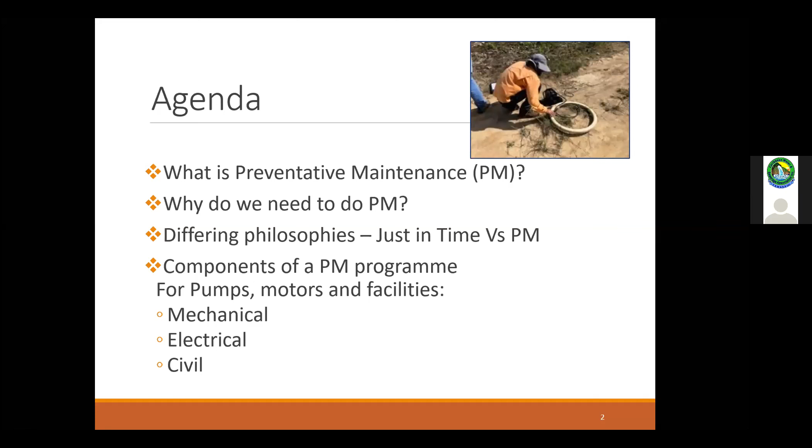So here's one definition, you've probably heard similar ones. PM, or preventive maintenance, basically is done to assure the optimal working conditions, and it conserves the lifespan of the equipment. So you've got different appurtenances in a water system, from pumps to motors, hydrants, reservoirs, tanks, pressure regulating valves, water meters - the whole list. And they all have different lifespans. When we purchase something new from a manufacturer, either one of, or 100, or 1,000 of them, they tell us that you might get a 15-year warranty, they tell us you might get a 1-year warranty.

But once it's live in the system and is delivering safe, potable drinking water, it now falls onto us as operators to ensure that it delivers both in accordance with quality specifications, and according to the budget that we've developed. So for instance, residential water meters - people call them the cash register of the water system, right? Our revenues are derived from usage through the meters, so it needs to be accurate, which means it needs to be tested. So that's just one example.

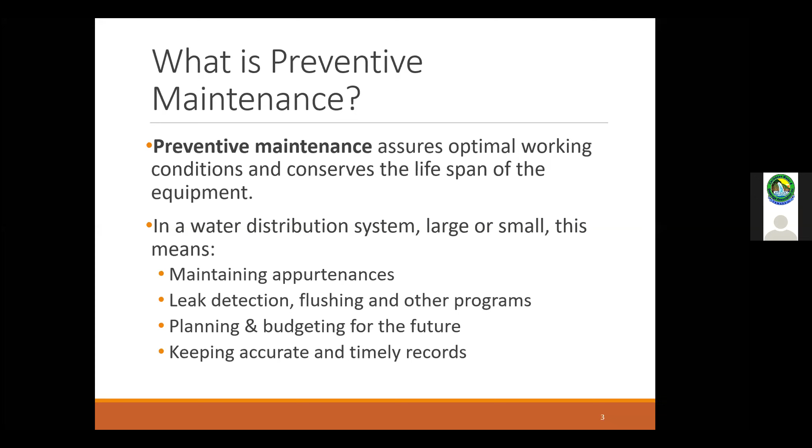So basically, a preventive maintenance program is these things. And again, wearing your operator hats, how well do you understand your system? I'm not talking about the systems I've worked in, but I want you to think about your systems - how it operates, what its strengths are, what its weaknesses are.

It may be the power supply that runs the pumps, or it might be the reliability or durability of your treatment plant. As operators, as you build up experience in your water system, you get to know where the strengths are and where the weak spots are in a system.

Even in the systems I've worked in, North Vancouver, because of the high change in elevation between our pressure zones, the weak spots were the very small, undersized reservoirs. As the population grew in that municipality, the reservoirs were not able to keep up in summertime, which meant a ton of overtime for operators to go and actually turn pumps on and off by hand to ensure the water supply didn't fail, not only for domestic supply, but for firefighting.

As operators, you start to know what your system is doing at certain times of day, different seasons, weather conditions, even different operating circumstances, like key operators not being able to come to work. So is there an impact on the actual system? Because if the only person who knows how to repair a pump, let's say, wins the lottery and is off work for the next 20 years spending all their money, how is the system going to function?

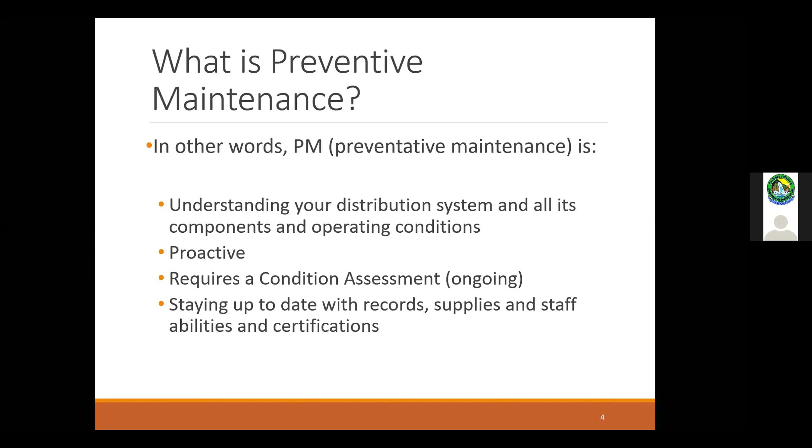they know it will be a nightmare to repair. Well, that's not preventive maintenance. That is not looking ahead with the sense of trying to optimize and maintain the system for the ratepayers, for the members of that community, so that whether it's a Sunday in July or a Thursday in December, the system will still perform. And I mentioned in the last bullet there on that slide, certifications. A trained staff is critical to doing preventive maintenance. Otherwise, you don't have the people ready in place to start some of the programs that we're going to talk about. So I hope that makes sense.

And again, some people ask, why do it at all? Why not just wait for it to fail? It is expensive to do preventive maintenance, because it means that you're rolling trucks and staff out onto the distribution system, looking for or turning valves, servicing and testing water meters that are working just fine. So is that doubling up?

Some people feel like, well, that raises the overall cost of managing the system to a point where if we have to go back to our council or to ratepayers and say we need more money because we have to have the money to take X number of pumps out of service and get them to the shop and have the motors checked and the impellers replaced.

Yes, but the understanding is that if we do it, we can minimize the opportunity. Not prevent entirely, but minimize the opportunity for failure. For sure, it doesn't guarantee that a failure won't happen. Utilities, I'd say some of the best run utilities all over the world still have water main breaks, still have flooding, still have power failures. So it's not about perfection. It's about ensuring that whatever the weakest link in the system is, you as an operator are aware of it and know what would have to happen in case that weak link does fail.

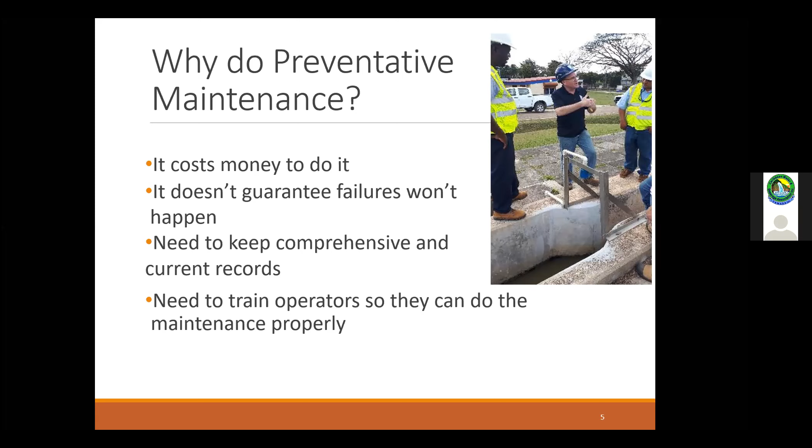So it's really critical that in order to be effective in your PM programs, operators need to be trained. And utilities overall, large and small, take that very seriously. Sometimes they don't have the resources necessary to train everyone to that level. So again, it's like reallocating the dollars you have where you think they will do the most good. I hope that makes sense.

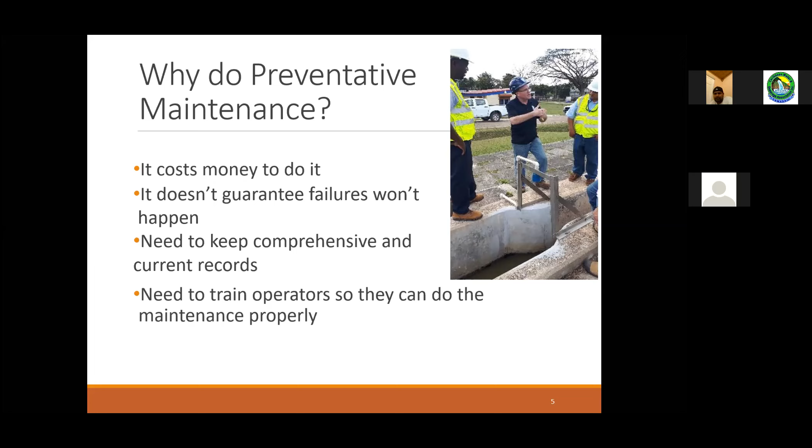So just as context, it's not always been about preventive maintenance.

The American Public Works Association for years operated on this idea that we will fix it when it breaks. So a road, the asphalt crumbles, sinkholes start to develop, erosion into ditches - okay, that's when we'll go out there and dig it up and repave it, or mill and pave, or do whatever strategy we can. A bridge is starting to fail, or it's undersized, then we'll find the money to make it work. That was a huge philosophy, and a lot of superintendents and managers had very good careers all the way through

the early 20th century on that philosophy. A couple of issues around that is that when infrastructure all starts to fail at the same time, 50 years after a building boom, and now we have 20 bridges or 3 dams and 16 reservoirs that need replaced, money in current dollars often not able to be found.

An example where I live right now is the schools, the children's schools need upgrade for earthquake - that's one of the big hazards this part of the world. Well, there's not enough money to fix all of the schools at the same time. So the idea of a preventive maintenance program, as opposed to just in time, is that you can start to determine what your future costs are going to be and start putting that money away. And if council doesn't give you the money, at least you have documents in existence that suggest that we have a shortfall 5 years from now, or right now. I mean, that's quite common, which the just-in-time school doesn't really allow you to do.

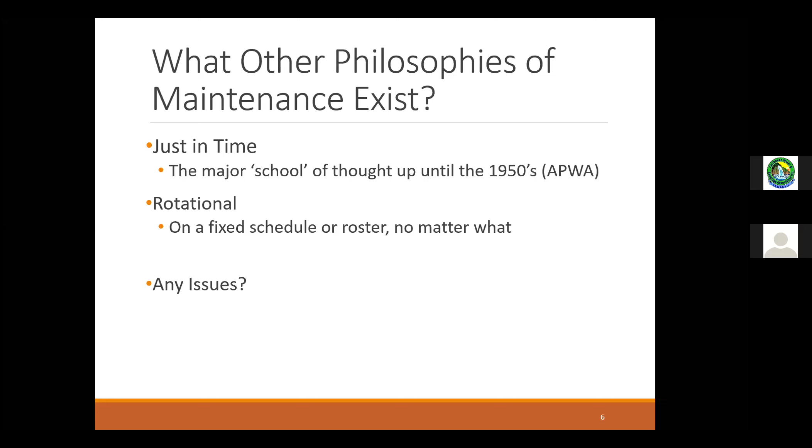So these have all been very popular ideas of how to maintain water systems, but they do fall short. And one of the keys about talking about preventive maintenance, in other words a proactive approach, is that we want to make sure that our ratepayers are getting the best value for the dollars they have, and that we're doing that by making it as reliable a system as possible. I mentioned earlier, as operators, we all inherit the system that we all had a first day of work.

Well, there was a water system there. Very few of us actually create the water system that we work for. So by inheriting it, we inherit all the good things and all the bad things, and all the strengths and weaknesses. So as a manager, when I went to a new water system, one of the first things I wanted to look at was the budget.

But more importantly than the total dollars spent, I wanted to see where the dollars were being spent compared to the actual reliability, age, or condition of the appurtenances. I want to match that up, right?

So as a pump mechanic, we'll talk a little bit more about pumps in a bit. I want to make sure that the time I have during a working day and week is spent where it's most needed. And the only way you can do that is by planning and having some sense of prioritizing what are the highest priorities in your area, whether that's in pumps and motors, or in the SCADA system, or in the treatment plant. Basically having that understanding of how the system works.

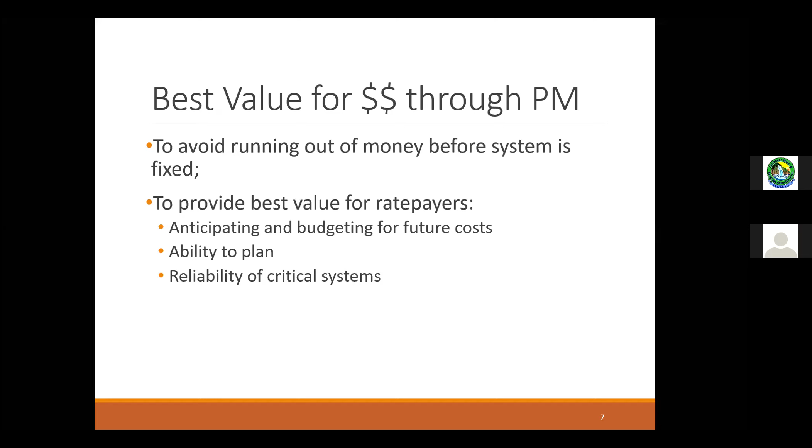So, talked a little bit about what due diligence is. And due diligence basically, it doesn't mean—if I can say I have done my due diligence, you hear lawyers talk about due diligence and insurance people talking about it—it really means, can I meet the standard that the city has set for me as an operator? So in other words, it doesn't mean having a gold-plated water system that never fails or never experiences low pressure, or leaks, or the occasional high spike of turbidity or taste and odor issues.

That's not it at all. It doesn't mean we never have a failure. But what it does mean is that I, as an operator, have done everything in my abilities and up to the levels I've been trained, with the resources the city gives me, to plan, to budget, and to minimize risk.

So knowing that a pipe that could fail because it's 75 years old, and we don't have the right couplings to make the repair—now you're not meeting the test of due diligence. You know the OD of that pipe, and you know that the repair couplings are 3 months away because they're an oddball fitting. Well, then the due diligence standard is we've ordered 2 of them, and we've identified that they are to be used in this segment only, and we've trained staff accordingly.

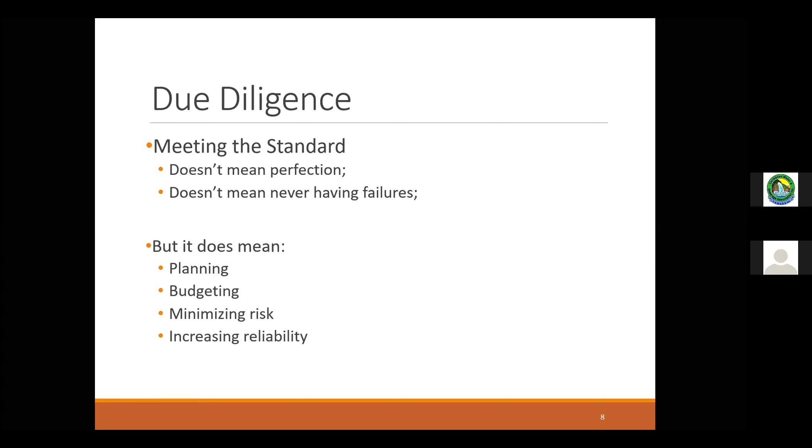So knowing and understanding what those boundaries are means that you can then plan accordingly. And in most utilities, there's never enough. The budgets are insufficient, and the pipe and the appurtenances are getting older, so that becomes a real issue. So it makes it doubly difficult, but it actually increases the need and the rationale for doing preventive maintenance. So again, an example.

So in a just-in-time philosophy, if I was the supervisor looking after water quality, you can tell you're working in a just-in-time type of environment when we only respond to complaints. We don't know what potentially could be happening in the water system, but someone's complained about dirty water or funny taste. So we go out and take a sample, get the lab results back, and then let the resident or business owner know.

We don't go out and flush ahead of time. We wait until either a health authority tells us we've had a violation, or that people are complaining.

We have little or limited or no understanding of how the system functions—in other words, where our high and low pressures are, because those can fluctuate seasonally or by time of day. And for those of you working with intermittent systems, what does that do to the water quality situation in your utility, and do you have to adjust accordingly?

So operators end up in a just-in-time philosophy with mostly just anecdotal information—stories people tell about how things are. As operators, we hear a lot of stories. It's one of our best things, collecting stories about how the system works. Do you remember when the water main on such and such a street exploded, and what we had to do to fix it?

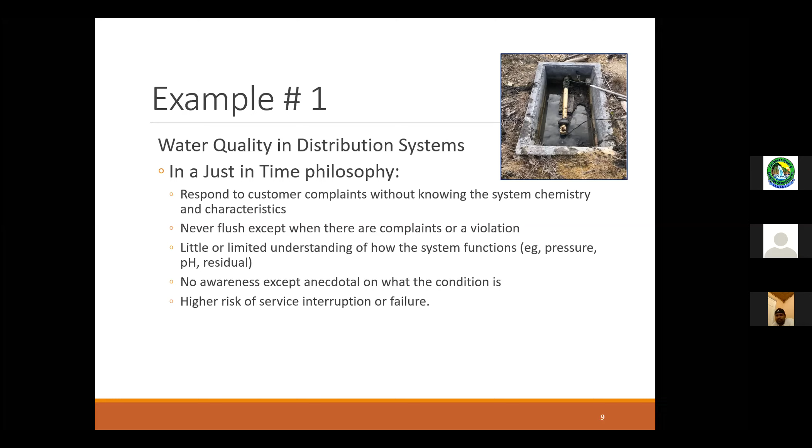But in a PM program, these are the kind of elements you'd expect to see. Programs are developed—we do sampling, we do monitoring. Where? As operators, you know where those weak links are: potential where one or two water supplies might be blended, or at the treatment plant, or leaving the treatment plant, or in a reservoir. We develop those locations and then start our scheduling.

A lot of utilities don't sample as much as they would like to because they don't have the budgets, but they still meet the test of due diligence because they're meeting the health authority's minimum requirement. Sure, they might love to do more sampling, but that's what they have the ability to do.

They flush water mains either seasonally or on a rotation, basically weekly or monthly, depending on the types of water quality issues. They use the data from sampling and monitoring to generate programs. A lot of utilities in the United States use HPCs—heterotrophic plate counts—the results of those samples as thresholds to begin spot flushing. So on top of an annual flushing program, they will do spot flushes wherever sample results exceed 200 CFUs. So they have the sense of being in front of potentially adverse water quality.

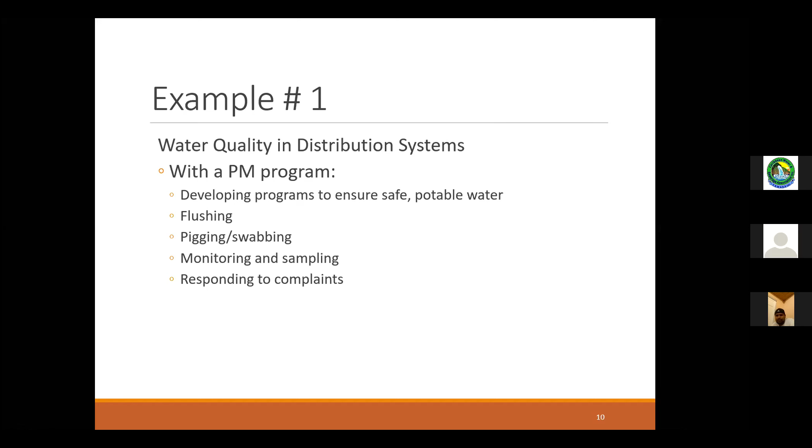In other words, they're not just waiting for the complaint to happen. They are looking at data that they or others in the utility collect, and then develop their programs. So now you have a sense of reaction versus planning, and you can apply that to all areas, right?

Just using fire hydrants and valves—think about your own system: out of the total number of valves, what's your confidence that all of those valves will operate when we need them to? That could simply be, can you get on the operating nut to turn a valve in an emergency? There are lots of places where valves are 12 feet deep in the colder parts of Canada and the United States, and those standpipes have lots of opportunity to fill up with rock, mud and debris. If those aren't maintained ahead of time, it could be a disaster in a major emergency, or even during a planned tie-in if those valves don't work.

The city of Oak Bay, a small municipality not far from where I am, was doing a great program—they were replacing all their old fire hydrants because they couldn't get parts for them. They finally had the budget to replace the fire hydrant, so they did that: they cut the fire hydrant off the stub. As they were lifting the fire hydrant out of the ditch, the stub caught the valve and pulled the valve off the main. It was an 18-inch main, so it instantly flooded their trench and then started flooding the neighborhood.

It took them 6 hours to shut the water main down, which caused over $1 million worth of damages because they couldn't get on the valves to make a quick shutdown to prevent worse damage.

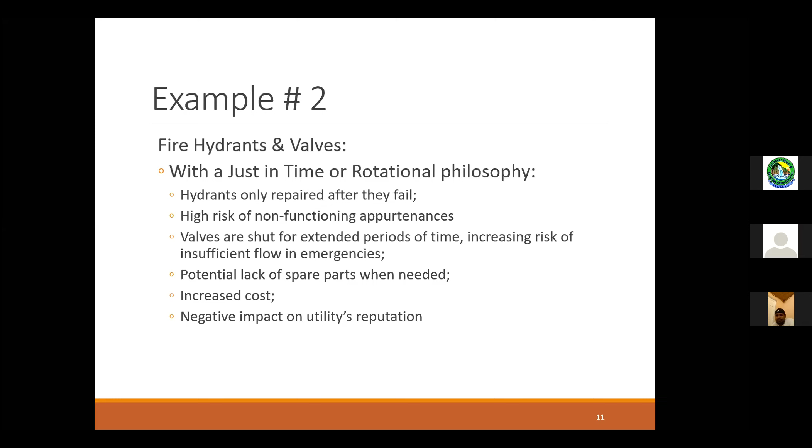So another example, but with a PM program: those valves, either whether it's an O-ring or the actual operating nut, we know about it, we fix it before we need that valve again. We schedule programs so it might take us 5 years to go through the whole city to check the valves, but we don't stop until we've checked it all.

Sure, there's nothing wrong with a valve, it hardly ever operates, right? The mains are open until we do something to them, but they better work if, 20 years from now, they're actually needed.

So we also then get a sense of what our infrastructure costs to look after, because we can budget labor, materials, and equipment to check all the valves. And if we have 1,000 valves, we can determine a price per valve on an aggregate basis to do preventive maintenance, and that goes into our planning for year 2 and then year 3.

Another example, before we start talking about pumps, is water mains themselves, and looking at how cities chase after leaks. Part of the issue in North America is water is very inexpensive, and certainly in this part of the world. So a lot of cities don't do any looking to replace valves or fix leaks before they surface.

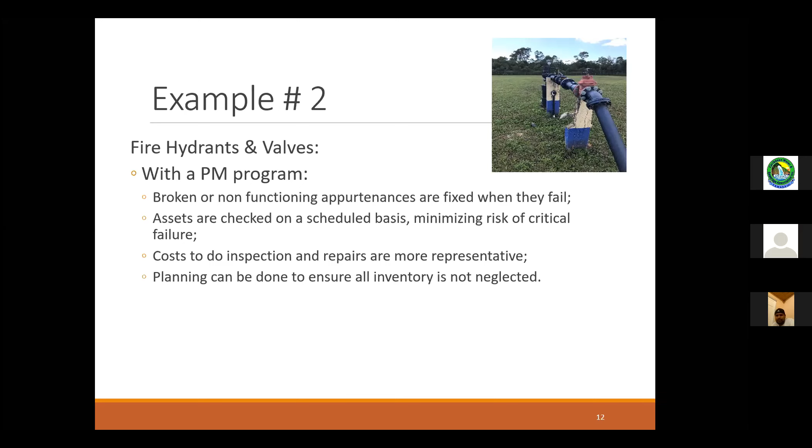So the American Water Works Association has a very simple mantra for operators: know your system. We mentioned how can you plan and understand how the system works if you don't know what's in the ground? What materials do you use? Is it iron? Is it plastic, C900, or Bionax, or poly?

What are the diameters? So how do we find the spare parts? We don't necessarily have to buy all the spare parts. We can have agreements with our suppliers to carry some stock in case of emergency or when we're doing some of our planned work. But to do that, we need to keep records.

And as operators, if your hands are touching the infrastructure, then you have the ability to collect data. Some utilities do it with barcode scanners, fancy asset management systems, whereas others just take a record of it on a card, and that card is updated in the office.

But basically, all of these bullets are about knowing how the system operates all year long - day, night, summer, winter, wet or dry conditions, peak demand versus minimal demand, because that varies depending on your community. So operators should know that, and it's really important for management of utilities to ensure that those operators are trained so that they have some understanding of what's going on.

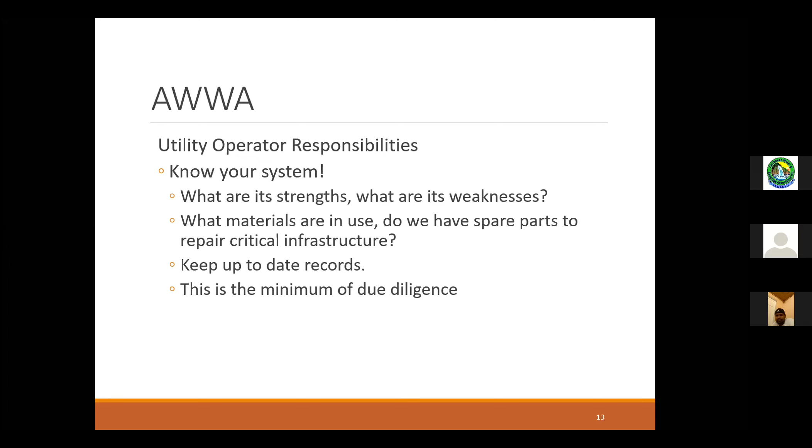And some of that is records and using them, not just putting them in a cupboard somewhere, but actually using those records going forward. So let's talk a little bit about pumps, and then I can take some questions.

So obviously critical infrastructure, right? Your pumps, motors, whether it's in a treatment plant, but specifically in a distribution system, we're pumping up to elevated storage or we're boosting inline.

If we do not have a PM program, there's a risk that a pump may fail, because it's running exceptionally high, or some of its impeller or its bearings are starting to wear, but we don't do anything before it fails. So not good.

If you do not have the ability to choose to take a pump out of service and you are simply at the mercy of a pump running and or failing, that's tough, because it's very difficult for operators to maintain standards of efficiency and also safety of the water system if you're waiting and just hoping. It's sort of the idea of fingers and toes crossed every day, and then hopefully nothing goes wrong.

Well, it's just math. Statistically, it will fail. The question is when. And that means, are we comfortable not having any spare parts? Do we have the right people to do the repair? And if something fails before we plan to do the repair, it's probably going to be more expensive.

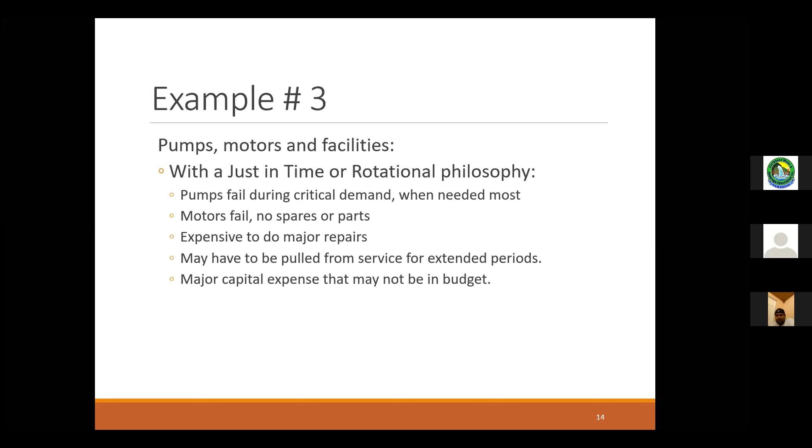And it may not be in the budget. A major pump or motor repair might exceed your operating budget and need to go for council approval, and that may take months. So if you have to do temporary bypass pumping, that's expensive, with potential impacts on health and safety as well.

But with a PM program, according to your manufacturer specs, you're servicing regularly, keep parts in stock either at your facility or at a supplier's. You're keeping records. Every time you go to a pump house, motor hours, pump hours are logged, system pressures and flows are kept so that you have a sense of how that pump is running.

If it takes 6 hours to pump, when yesterday it only took 3 hours, what's changed? Could it be an issue in the pump itself? Could there be a restriction, a valve shut? But without that data, very difficult to know.

So a PM program means we're going to do inspections. We're not just going to show up when something breaks, but inspections are done to catch problems before they arise or get worse. And that is really key, especially in the summertime, when people go on holidays, vacation, or retire.

Is the replacement staff operator trained and understands all of the steps necessary to keep the equipment and tools running.

You can tell a lot about how the system is run by how the tools that operators use are kept. Are they chucked into the back of the truck willy-nilly? Are they dirty and rusty? Or no, we know where we can find the tool, we know where we can find the materials, and they're all in good shape. This also increases the pride that you are, as operators, critical in maintaining the integrity of the water system.

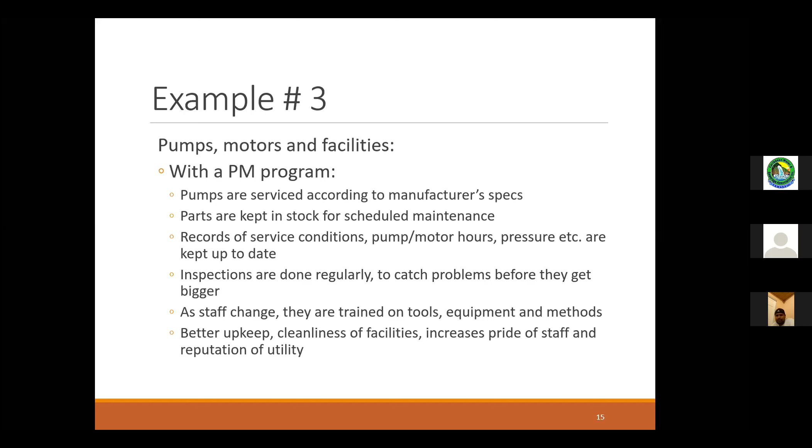If you're not building on the preventive maintenance program and helping it with more information and data, then the risk can be cost, reliability, and basically the reputation of the system.

So specifically for pumps, this isn't an exhaustive thing by any means, but just a sense of what kind of things you'd be looking for. They fall into three categories: pumps, motors, facilities. There's mechanical considerations, electrical components, and civil.

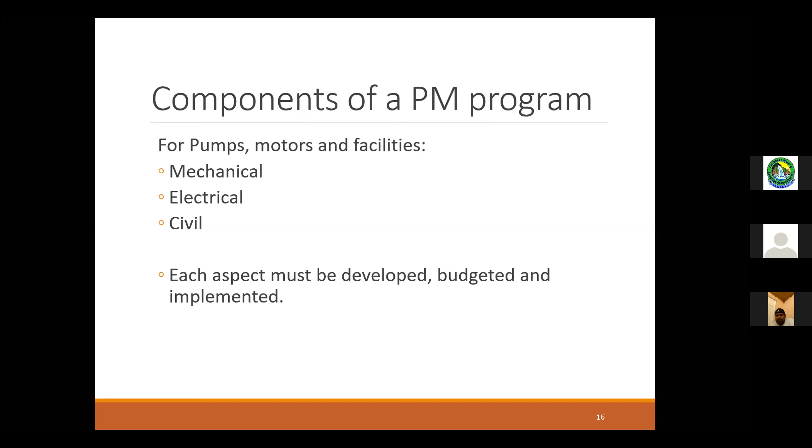Again, inspect and plan so that you have the ability to develop programs around each, budget, and implement. The manufacturers of the equipment can provide you with that information, so you don't have to start from scratch. For mechanical, things like valves and control equipment, the manufacturer will suggest what those inspection cycles are.

And by keeping records of running hours, it's not just once a week visiting a pump station or pump house, or once a day in peak times, but actually logging the hours running. As an operator, you'll start to learn which pump is working and which isn't, which is starting to slip. We're going to have to pull it and check the impeller or get a service done.

And the more you know, the more specific you can be when work has to take place. So you can either call a contractor or do the work yourself. And again, that last bullet - qualified employees do the work. Not just for the safety of the employee, especially working around electrical systems, but also around ensuring that the equipment will last as long as the manufacturer said it would.

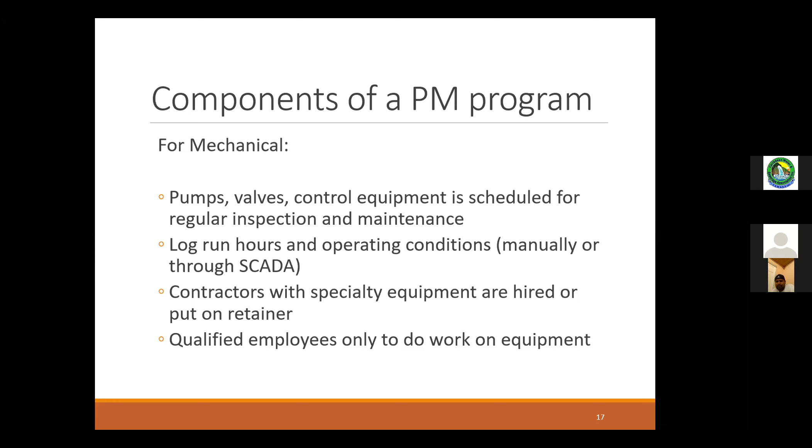And you don't void any warranties. Motors, fans, variable speed drives, and all that related equipment - again, manufacturers will tell you what the inspection criteria are, and whether you call them up when it's new and have them walk you through the actual inspection procedure, or use open source information or AWWA resources to understand how to do the different pieces of inspection and maintenance on a regular basis.

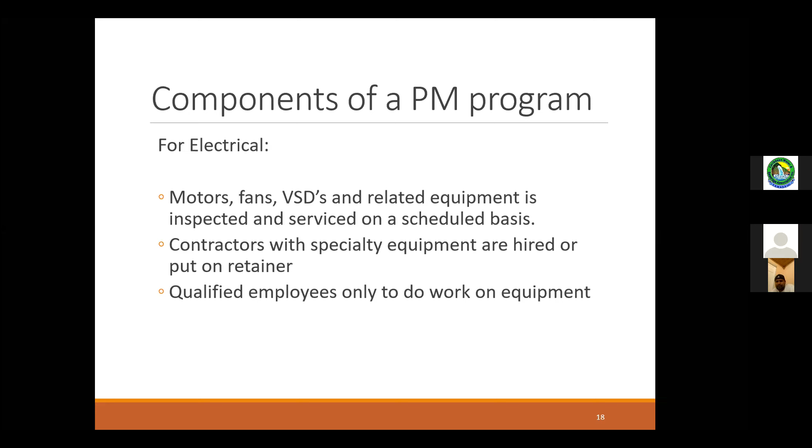Again, qualified employees have to do this. So that may be certified electricians or contractors with the appropriate tickets to work on those systems.

Civil often gets overlooked, whether it's taking off the graffiti on the outside of a pump house, whether it's clearing the vents away from materials that get piled up, or animals that make home in the vents and screens. All of that is an asset that needs to be maintained.

And again, records are just as important to keep up to date, so that you can look at the integrity of the actual pump house, housing, or chamber. Lots of examples about cracking and crumbling pump bases or motor bases that then misalign the pump and the motor, and then you have equipment failure, which could have been prevented if the operators were told or learned how to do inspections for the facilities themselves.

And as simple as, are the hatches and ladders and so on, is there proper security, and do they function as they were intended?

A lot of specialists in asset management talk about their view when they come into a utility - if the small things aren't being done well, the system might still work, but small things have a tendency to accumulate and potentially escalate. So they always look and see, well, if you're not doing the small things, are you really prepared for when larger programs or larger pieces of equipment need to be maintained?

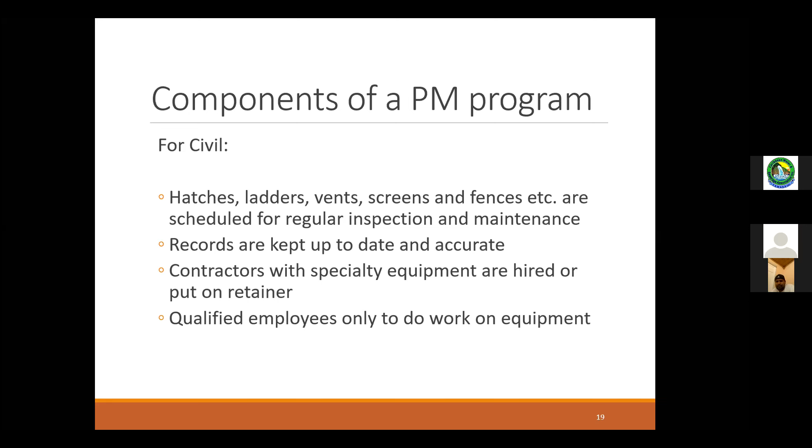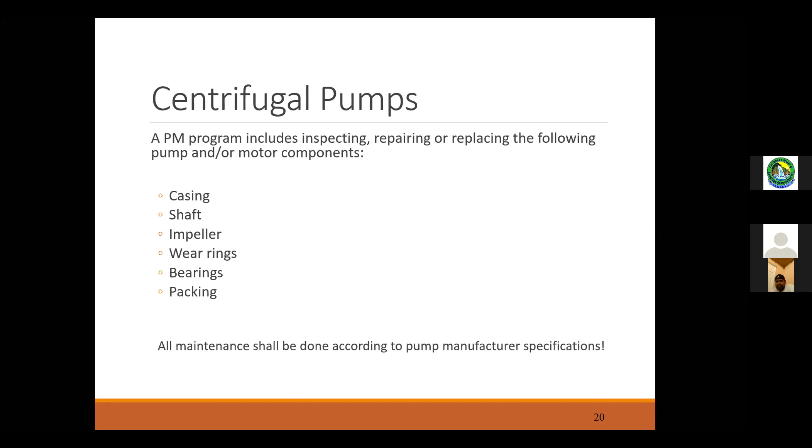And again, you've all probably seen these - basically the components of a pump, knowing that all of these aspects need to be inspected. There's a quick cutaway of a small centrifugal pump. If you can't do the work to replace the wear ring and check on the impeller, then who can?

And again, if you have to send the pump out to be serviced, what's the best time of year to do that to minimize disruption? In the hottest weather, probably not good. If you need 2 pumps to run in a station, you're gonna have to find a time either when the flows are lower to take it out of service, or find a bypass or a secondary pump to take its place.

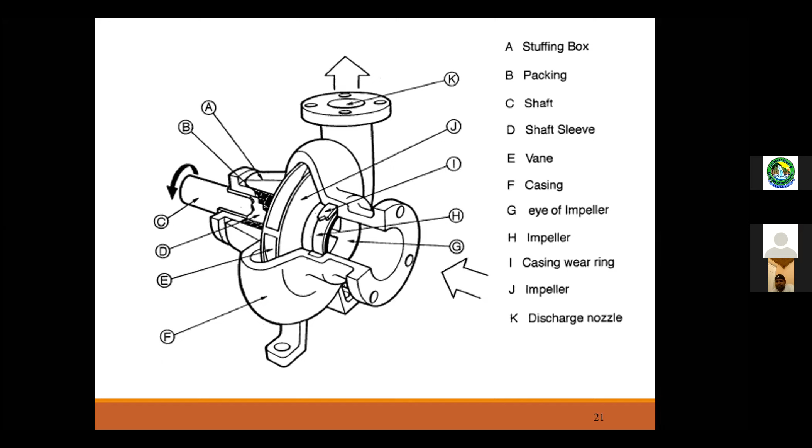So again, when you have operators trained in the various aspects of maintenance - there's an example of different types of impellers, and the supplier, it's all the same supplier. These are applications for different types of pumps.

They will have lots of information for you about how often it needs to be inspected based on the conditions of the water that you're pumping. If there's grit, it's going to be more often than if the water's already clean. If you're operating a pump at a high end of the pump curve and you get cavitation, then you're going to have to inspect more often.

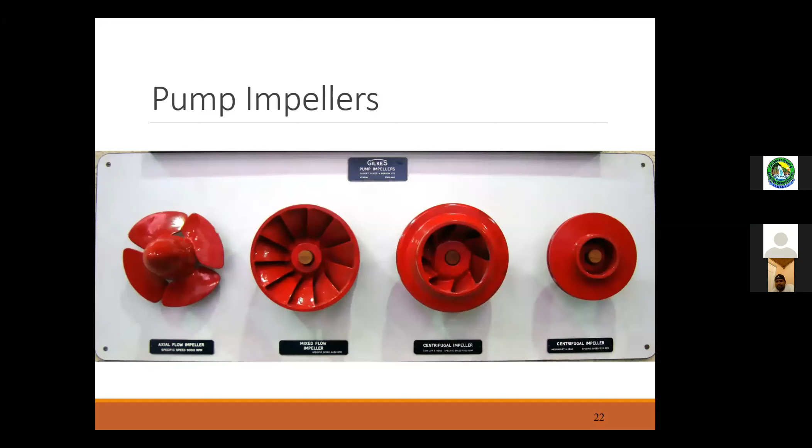But again, as operators, you start to learn the actual specific operating conditions in your water supply. There's a cutaway of some packing glands, basically.

In this case, if you have to replace the packing yourself, follow the manufacturer's recommendations, make sure the pump and motor are locked out, and that you have the right equipment, not only to pull the rings, the packing apart, but also to replace it and put the right packing back in. Otherwise, you end up with more problems than not, right?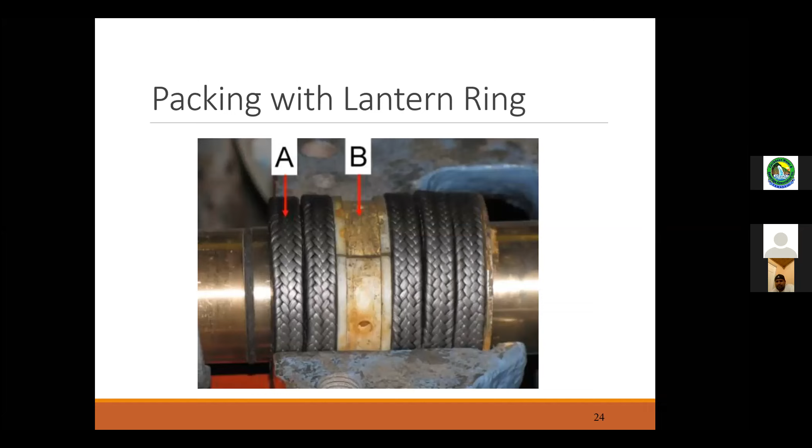It's basically, you're not starting from scratch. There's a lot of information out there already, but the key is that you're trying to implement an inspection and preventive maintenance program. If you have mechanical seals, well then you've got advantages over packing, but probably you can't do that replacement depending on your shop. So you may bring the manufacturer in to do that work, or pull a pump and take it to them.

Utilities are different. In more remote areas, the shops tend to be more self-sufficient, and the mechanics that run them can do a full slate of maintenance work and repair work, because the option of sending that piece of equipment to a city to do the work is not there.

Whereas in Vancouver, lots of qualified shops close by, so the cities can meet the test of due diligence. They can take the pump there in an hour, and next day or two days later, depending on the work, it's back and ready to go put back in service. So their staff could carry on doing their inspection and maintenance work without interruption.

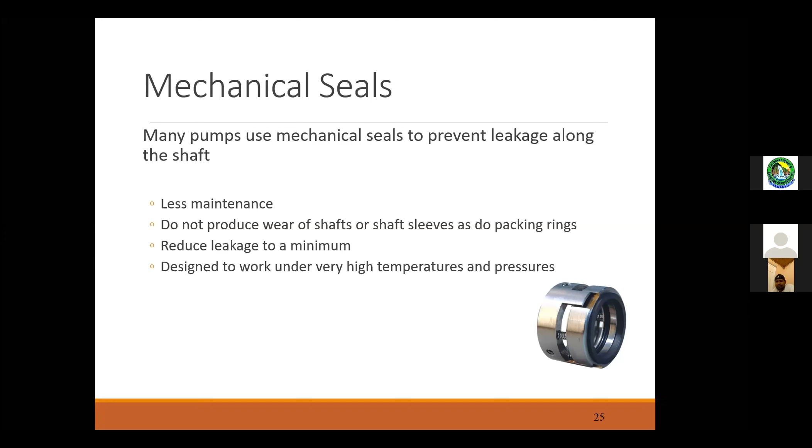So again, some examples, when you're doing maintenance on the pump, not just investigating what's happening there, but looking for, is the pump running according to the curves that were created when the pump station or booster station was designed? Is it making the right sounds? Operators will put their hands on the piping and confirm that the pump is running smoothly.

There's not any highly turbulent water moving through. We're not having these surges by going through the piping irregularly.

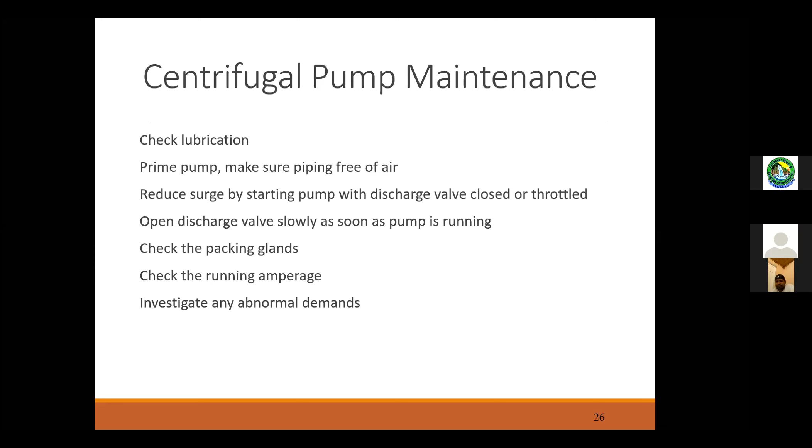As operators, once we know how to do this, we do this regularly. It could be weekly, bi-weekly, or monthly, depending on how many hours the pumps run. And a lot of times for utilities that have pump stations that only operate in the summer, it's almost more important to do the maintenance in the winter so that when demand periods start to pick up, the equipment works.

And much the same philosophy with motors, right? Bearings, the shaft, the windings, are we doing inspections, checking the current, going through that motor to make sure nothing's changing so that in critical usage, the motor does what it's supposed to do.

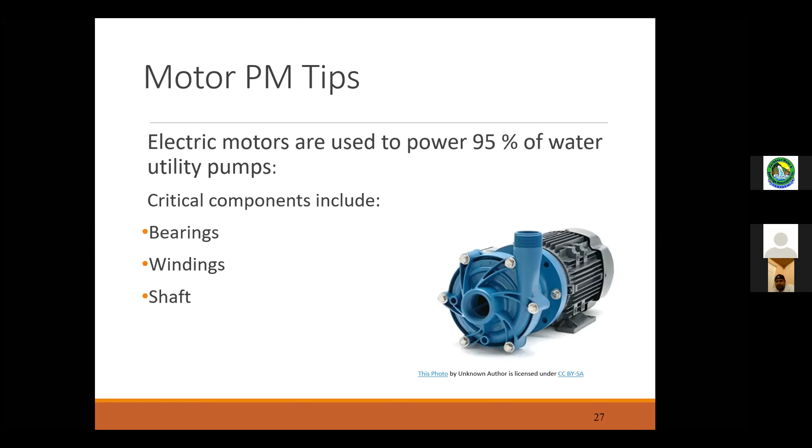Ball bearings, the same, knowing what the manufacturer's specs are for greasing and lubricating bearings and using the right grease, not just the cheapest, but making sure that less is more, that you're using the lubricant in the right way, and of course disposing of the old grease correctly. But if you wait for the bearing to fail, then not only do you have the bearing issue, but you could have a shaft issue and the actual motor and or pump itself.

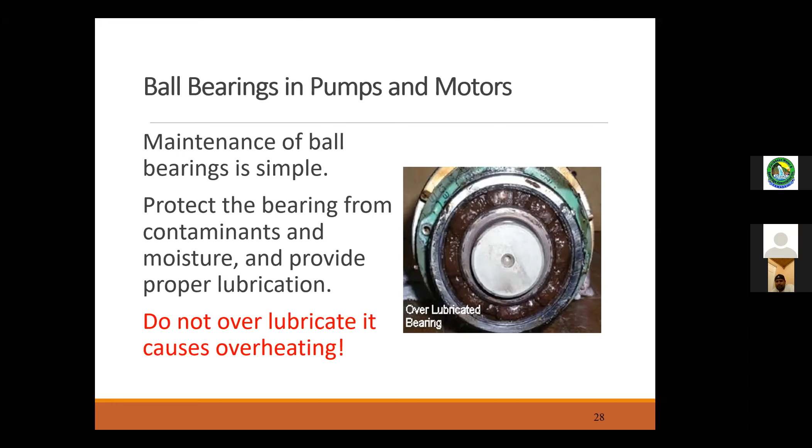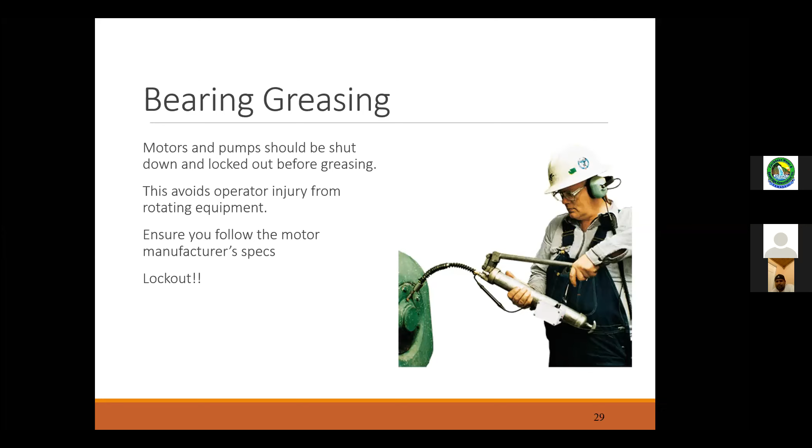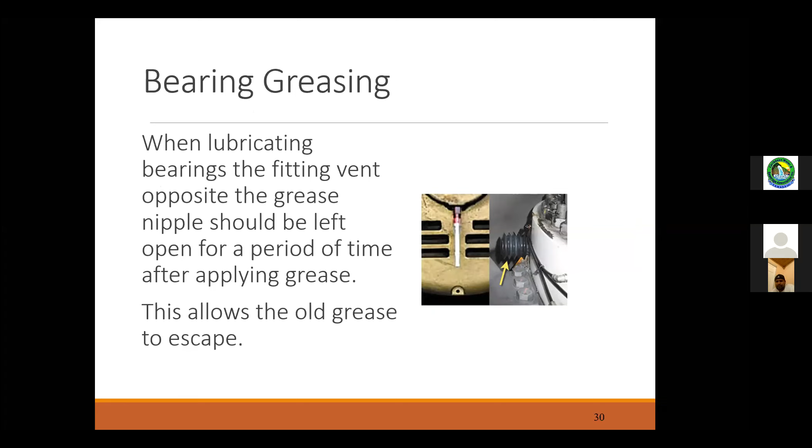Another quick slide there, but basically following the proper procedures for replacing the grease in a bearing.

With windings, oftentimes we can check the load on the windings in the motor, but taking it out of service, it might have to get baked and rewound depending on how long that motor has been in service. Then setting up a program, whether it's annual load testing, recording hours of operation, and having to pull that motor. Might be 5 years before it needs to be pulled, depending on how many hours it works.

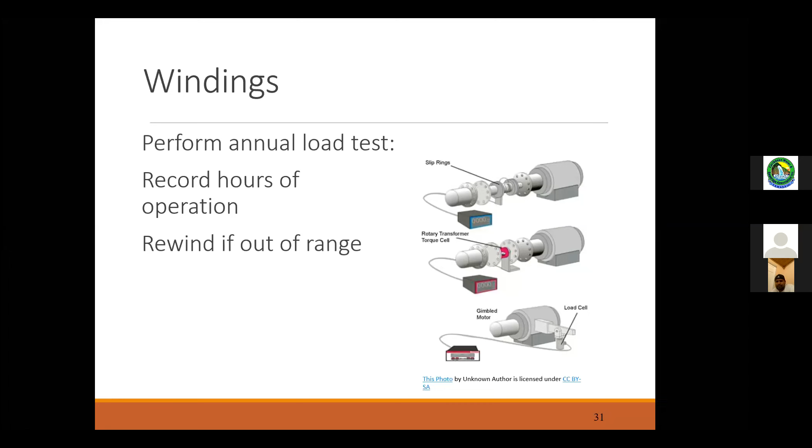But the idea is that by doing this PM work, you have a sense of increasing the reliability of that motor, which is what it's all about.

Part of that is the alignment of the shaft, and it could be a very small change in the alignment based on the material pumped. It puts stress on the impeller, and now the shaft is slightly out of alignment. If we never measure and check it, by the time there's a failure, we have multiple problems as a result.

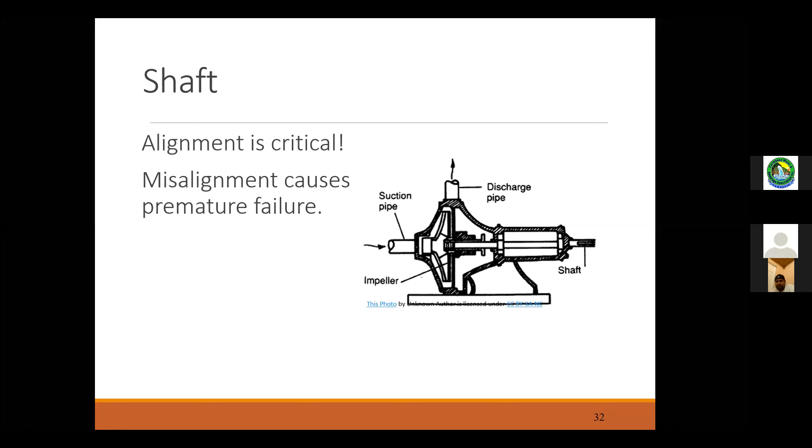So just to wrap up, I think I'm close to time. Really, starting a preventive maintenance program, if you don't have one now, is about changing the mindsets of the staff, but also of the utility, the council, and management. It has to include training for the operators, because they cannot create and maintain a preventive maintenance program without being a key part.

Management might say, yeah, we're going to do preventive maintenance, but without trained operators, it's very difficult to do, if not impossible. And it includes keeping records, keeping up to date on what we've got in the ground and what condition it's in.

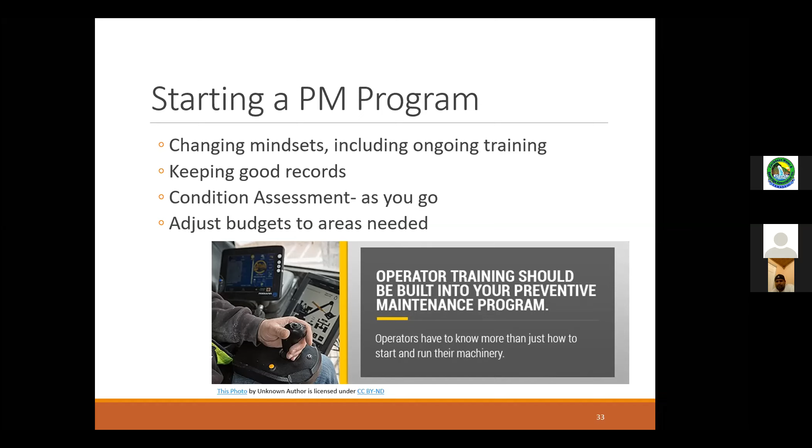And then as a supervisor, adjusting the budgets accordingly - you may have several years of having to spend more money on hydrants or valves because things have slipped. But once that's caught up, that money can move into pumps or meters or other areas, because again, you're being proactive as opposed to reactive.

The reward is ultimately greater reliability, which gives durability to the system to survive in the toughest operating circumstances that you have. You provide best value for money. Again, it's not necessarily the cheapest way to go, but it's the best value proposition for your ratepayers. And with that comes increased reputation of the utility.

And you as an operator, right? Because you have skills that you've actually been able to use, not just as a custodian, which a lot of times when we just respond to problems is how people think of us, but actually as a skilled operator that is critical in terms of keeping people's water supply safe and reliable.

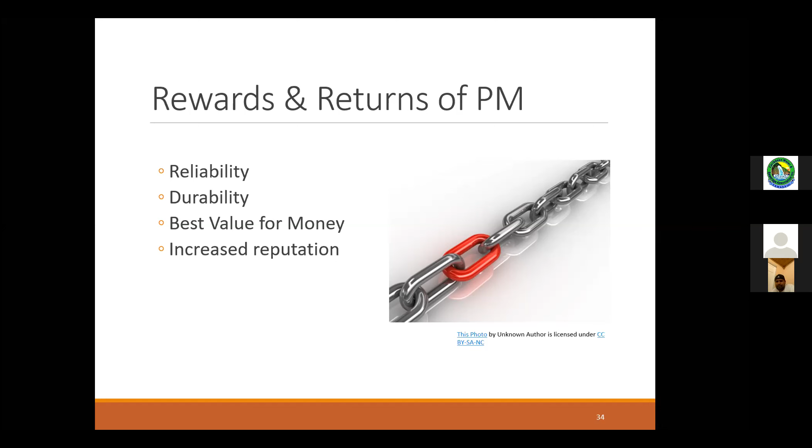All right, that's basically all that I have. I hope that has helped in some way.

If you could just share your screen with me, Mike, I'd just like to show that one slide or document that I have on what goes into setting up.

All right, you can do that. I don't know if Ignatius has to do that. Which one is it? No, it's multiple screens, so you could share your screen. Can you see what's on my screen? Not yet. Well, just ask Mike to pull up the slide that you want. No, it's a different one, it's a Microsoft Word document. Oh, I see. That's on my desktop. Mike does have a copy of it, but I don't know if he has it. Well, you could share your screen then, Valerie. I'm trying to do that. Yeah, it's coming on. Share. Can you see that? Not as yet. It's not come on as yet. No.